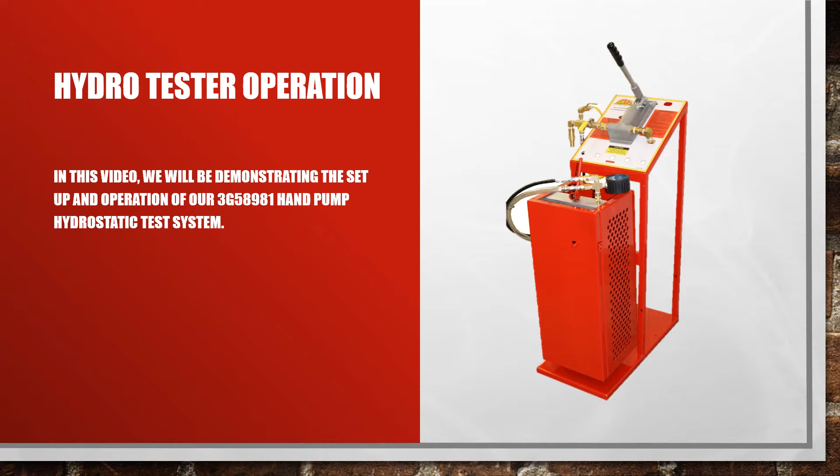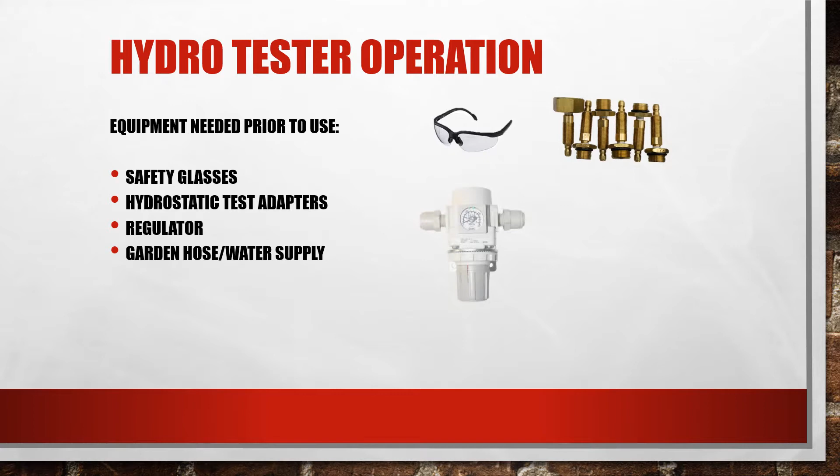Equipment needed prior to use: safety glasses, hydrostatic test adapters, regulator, garden hose or water supply.

Warning: do not exceed 90 psi of incoming air supply. Do not operate without approved safety glasses. Do not modify any components within the system or use parts other than Getz equipment parts. The maximum testing pressure for this pump is 850 psi.

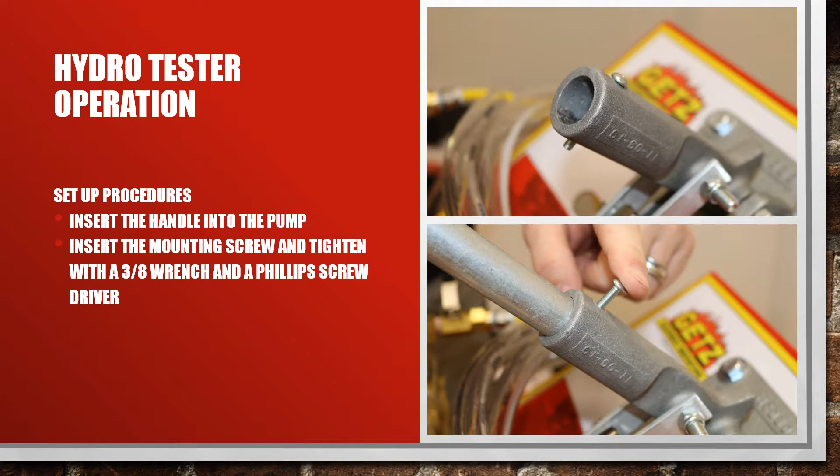Setup procedures: insert the handle into the pump. Insert the mounting screw and tighten with a 3/8 wrench and a Phillips screwdriver. Connect the male fitting on your garden hose to the coupler and tighten securely. Connect the female fitting on the garden hose to a clean water supply.

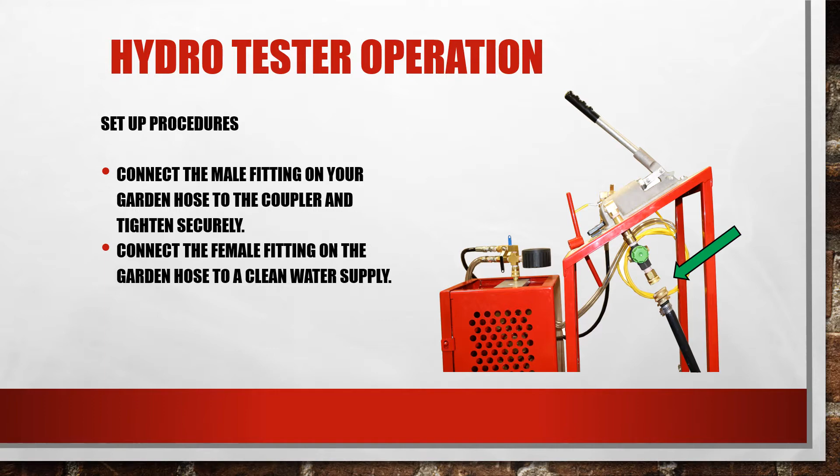Close the blue and black valves on your hose assembly. Open the water supply valve. Check for leaks.

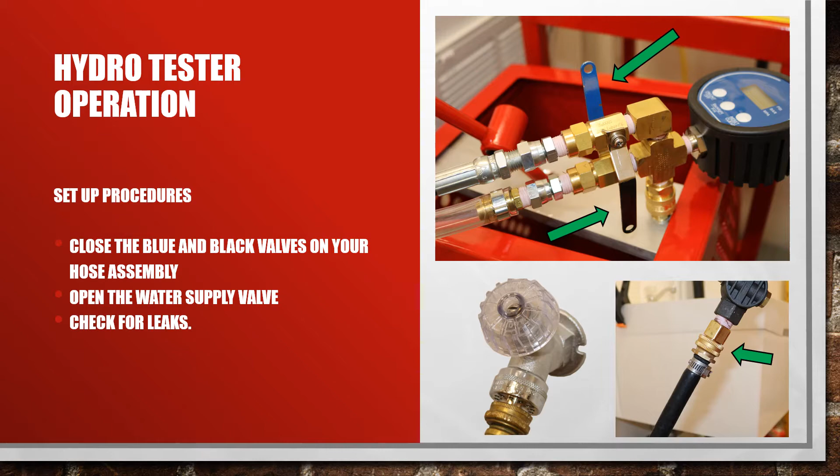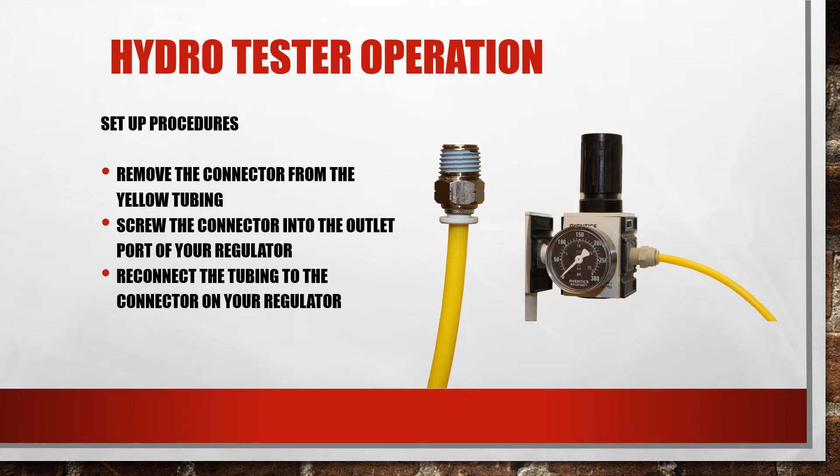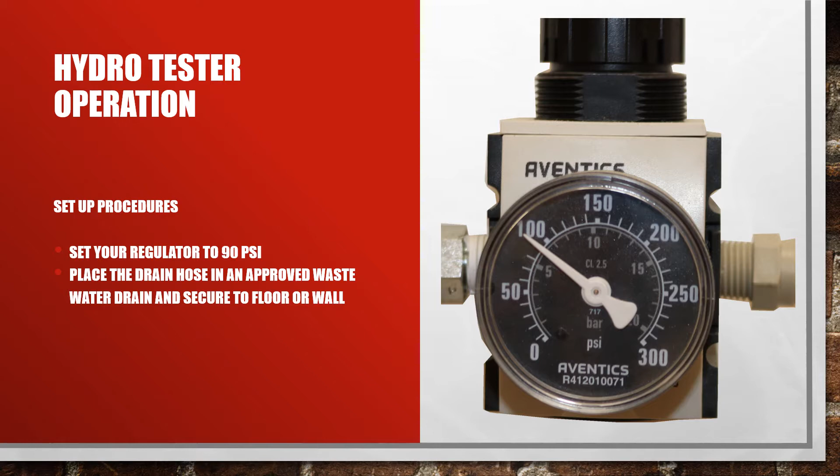Remove the connector from the yellow tubing. Screw the connector into the outlet port of your regulator. Reconnect the tubing to the connector on your regulator. Set your regulator to 90 psi. Place the drain hose in an approved wastewater drain and secure the hose to the floor or the wall.

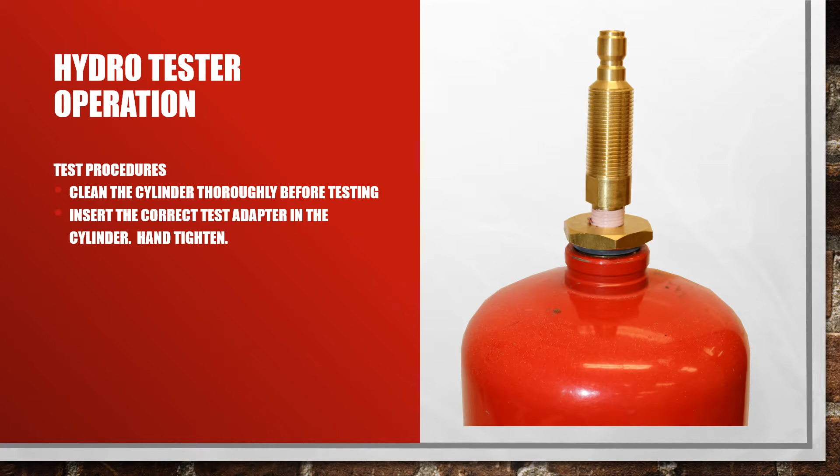Test procedures: clean the cylinder thoroughly before testing. Insert the correct test adapter in the cylinder and hand tighten. Connect the cylinder to the hydrotester head assembly.

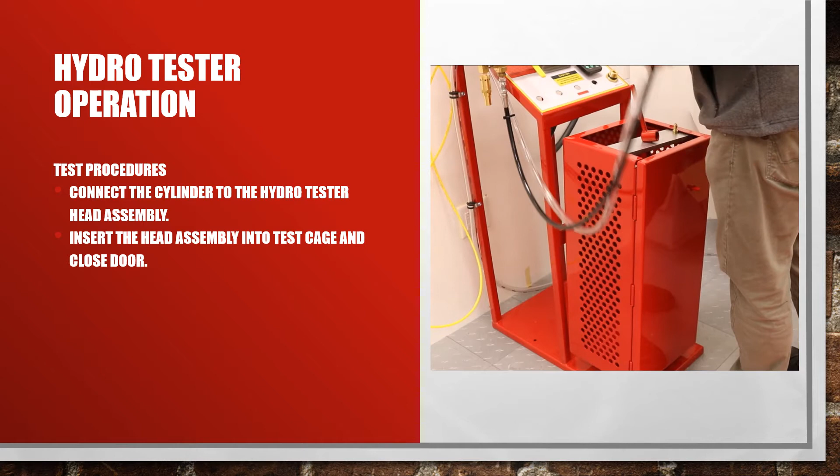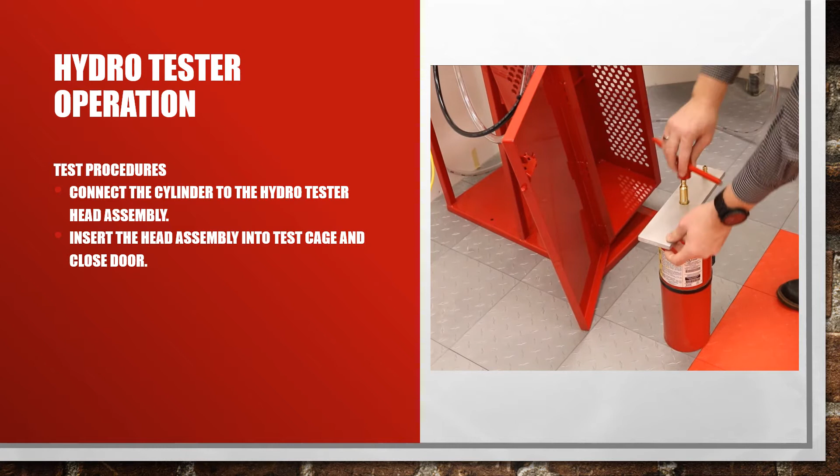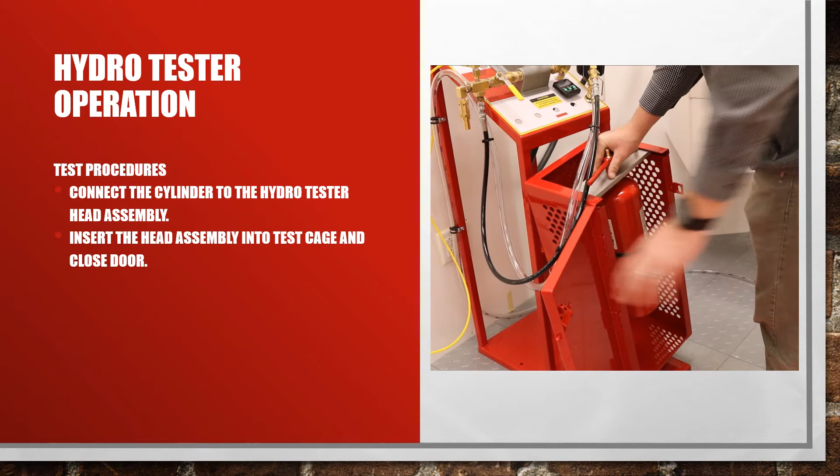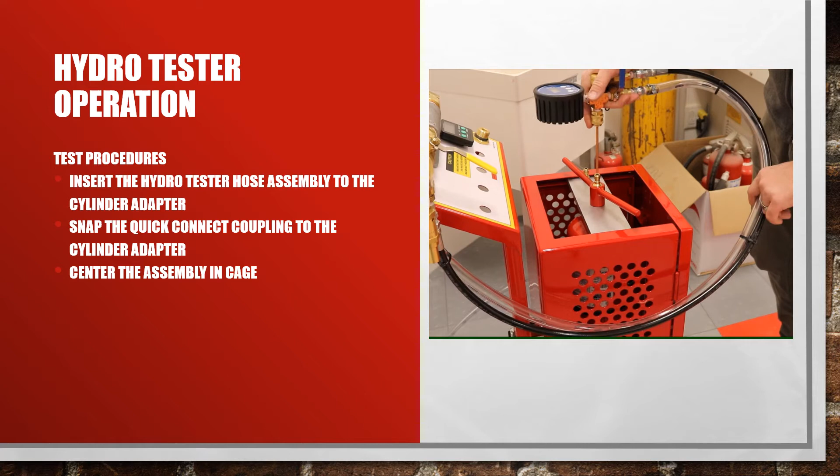Then insert the head assembly into the test cage and close the door. Insert the hydrotester hose assembly to the cylinder adapter. Snap the quick connect coupling to the cylinder adapter and center the assembly in the cage.

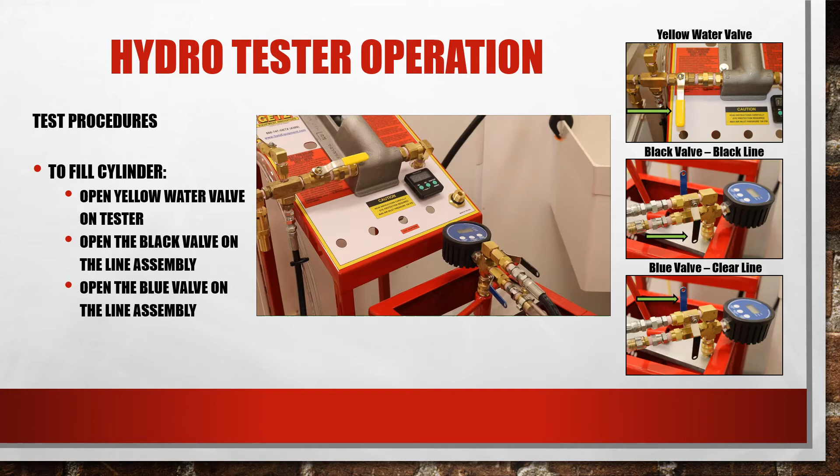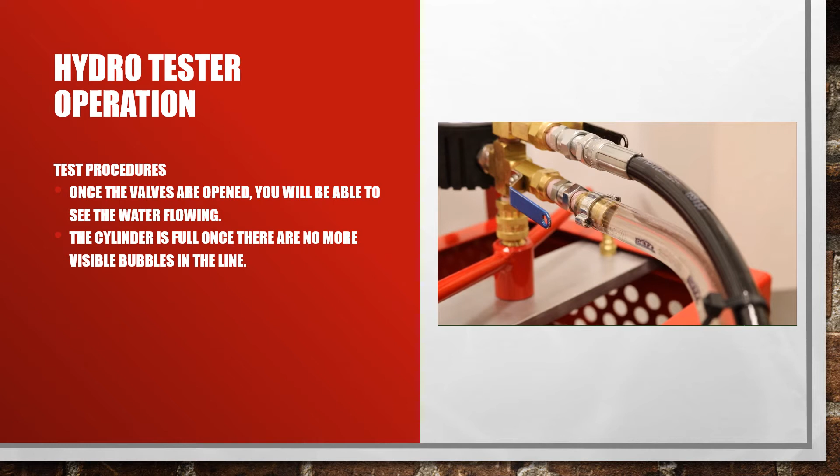To fill the cylinder, open the yellow water valve on the tester. Then open the black valve on the line assembly and the blue valve on the line assembly. Once the valves are open, you will be able to see the water flowing in the clear line. The cylinder is full once there are no more visible bubbles in the line.

Once there are no more visible bubbles in the line, close the blue drain valve and apply a slight amount of pressure to the hand pump. Reopen the blue valve to assure all the air is purged from the cylinder and close the blue drain valve again. Begin pumping up the pressure by pulling the handle on the hydrotester.

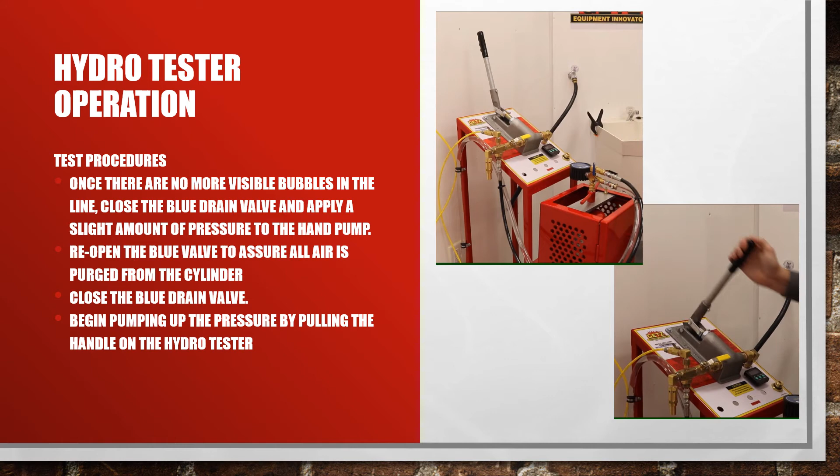Pump the handle until the recommended test pressure is reached on the gauge. Once the pressure is reached, close the yellow water valve and the black valve on the hose assembly.

Monitor the pressure for 30 seconds. The pressure shall be stable by the end of the test time and must not drop below the minimum test pressure.

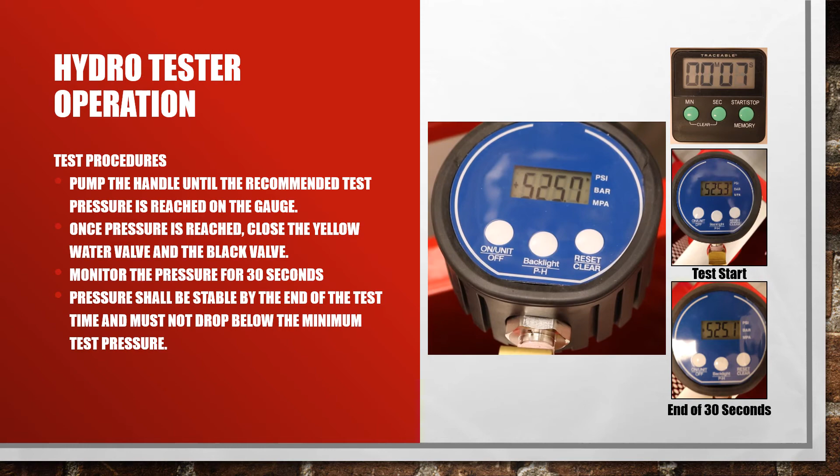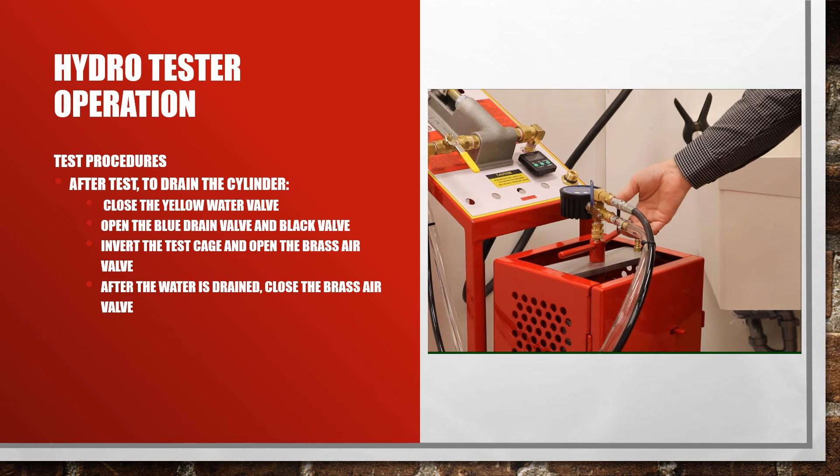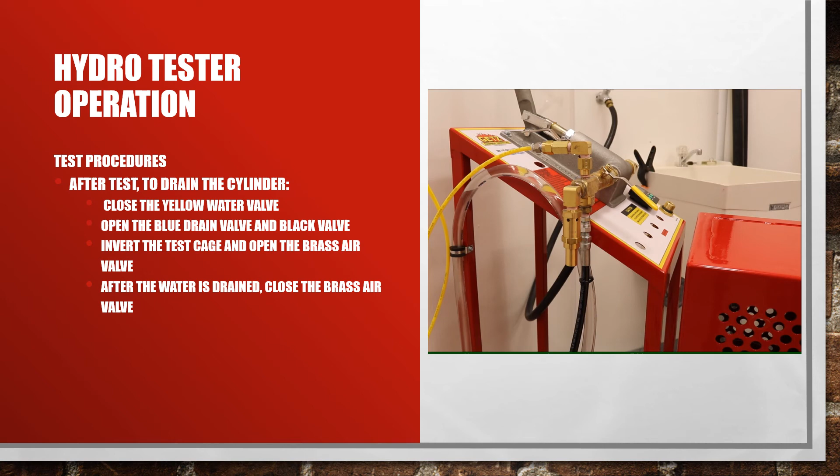After the test, to drain the cylinder, close the yellow water valve, open the blue drain valve and the black valve on the hose assembly, invert the test cage, and open the brass air valve. After the water is drained, close the brass air valve.

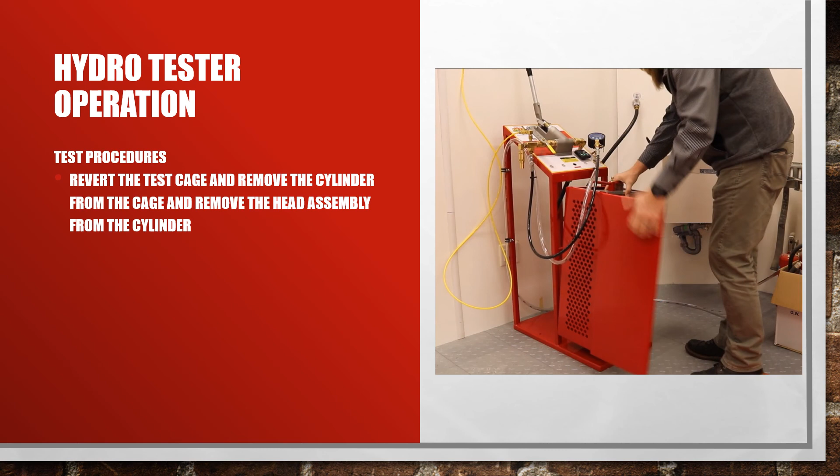After the water is drained, revert the test cage and remove the cylinder from the cage. Once the cylinder is removed, you can remove the head assembly from the cylinder.